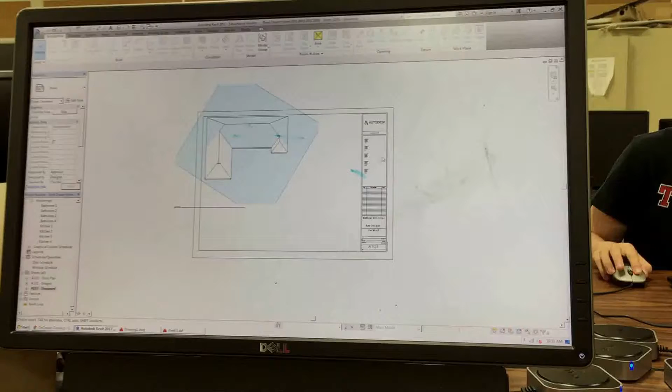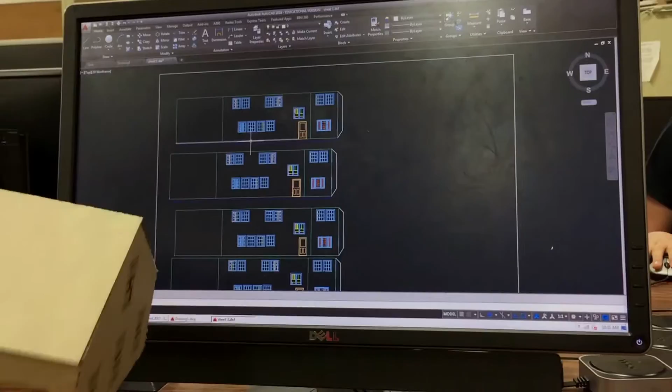Alright, so this little demonstration here will demonstrate how to export views from your Revit model of a three-dimensional house and create two-dimensional views in AutoCAD that can be exported to the laser to be cut out of a material like cardboard and end up with a 3D house model of your Revit model.

So the first thing you have to recognize is that this is a 3D model and the laser only cuts or engraves two-dimensional materials. So you have to extract the two-dimensional information from your Revit model, like elevations, roof planes, things of that nature, and then lay them out on a material. This is your final view.

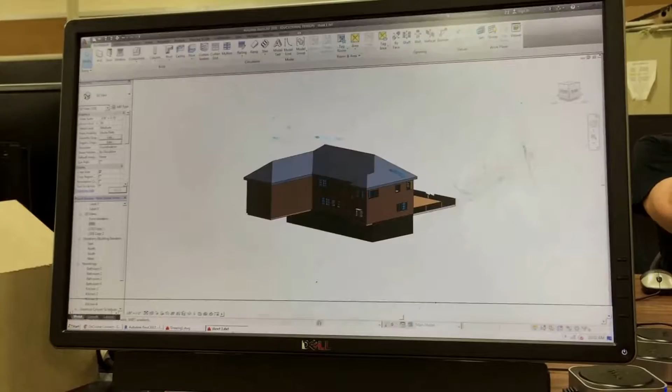This would represent like a piece of cardboard, 2 foot by 3 foot, and then your walls, windows, doors, and then pick what's going to be a cut, scan, engrave, or a dot for folds. Like for example, this is a glue tab I added on here. You might want to dot this line here so it'll fold, like you see here in the house. These are dotted lines so that they'll create folds.

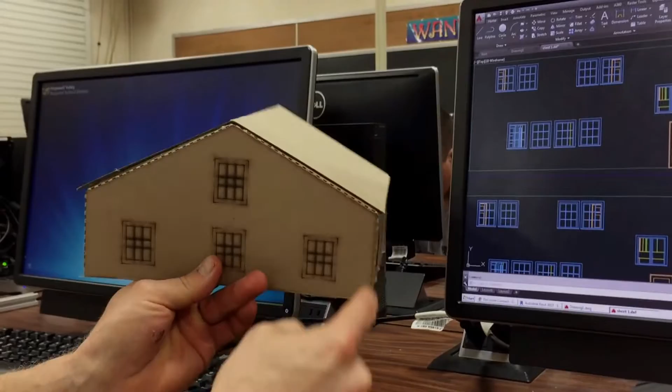And on the inside of your model, which you won't see from the outside, you'll have glue tabs to assemble your model, because if you just have two pieces glued edge to edge, it won't hold together very well. So here's the procedure for how to do that.

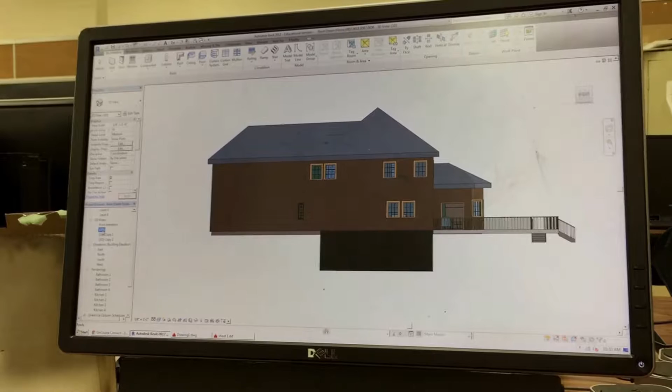So from Revit, you have to start with a simple view, like maybe your right elevation view. You should duplicate the view first. So to duplicate your 3D view, select it, right click, duplicate view, duplicate. Okay, so it creates a copy. Then you should rename them so you know what in the world all your views mean. Maybe call this right elevation, or right for short, or walls.

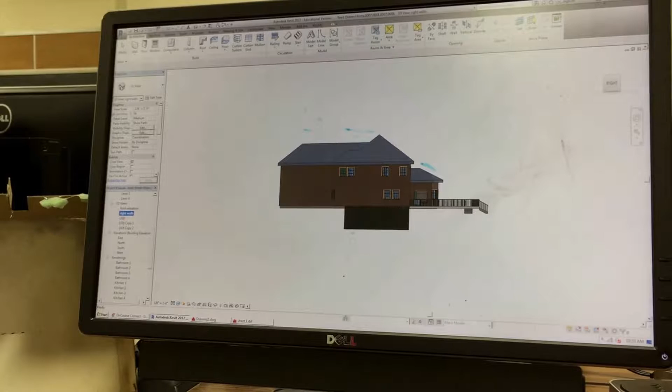So do that. Then, if you're only interested in these walls, you have to isolate those so that you don't get all this other stuff in your exports. So you can do it a couple of ways. You can hide everything from view, or you can select the elements that you want to keep, such as the walls that you want. You can control click to select multiple things.

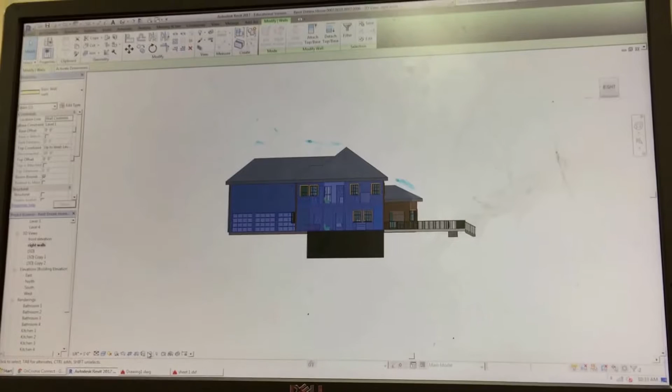And then you can go down here to temporary hide and go to isolate element, and then everything else disappears from view, so you're only working with those. Now that's going to be on this view here. That's why it's important to duplicate it, because you'll see that in a second.

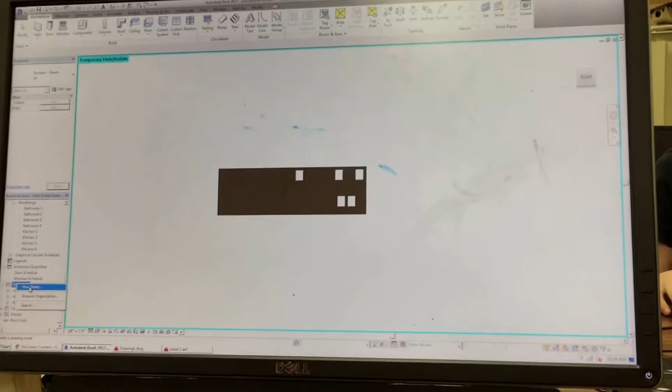So now you want to create a drawing sheet to export this to. So down here, just like you created a drawing sheet before, I right click new sheet and I just picked the biggest one, and here's my new sheet. Once you have this new sheet created, you can drag in your drawing view. So this was right walls I just did, so I can drag that in here and place it somewhere on my drawing sheet and pick a scale.

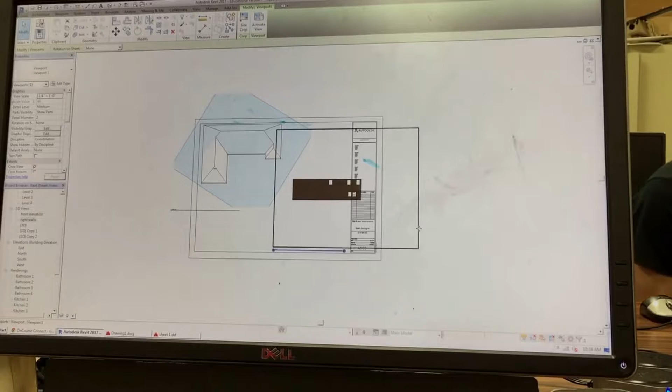So by default it goes to 1/8 inch. I would do 1/4 inch equals a foot, and then that changes the size of it. If you want to, you can crop the view so that you can get rid of these lines, but in the end it really doesn't matter, because all you need is this from here.

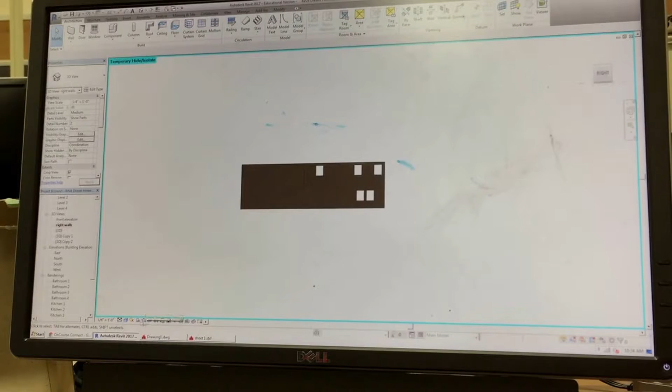You should also change your visual style. You don't need a solid background, so what I found works the best is the 2D hidden. So if you go to, I think it's visual style, change this to hidden line. That way you just have lines for the perimeter, not everything else shaded. And if you go back here to your drawing sheet, you'll see that updated.

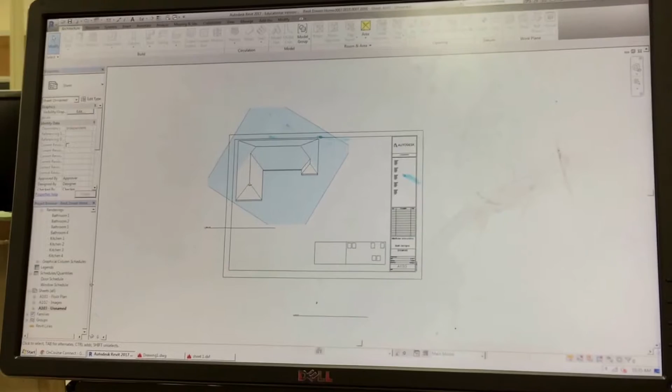Alright, now for the roof. I created this before. So the roof is one of the most tedious parts, because your roof can't just be exported from one of your right, front, or back views, because all these roof planes are sloped. Unless you have a flat roof, which most of you don't, you have to export these planes one at a time. So here's how to do that.

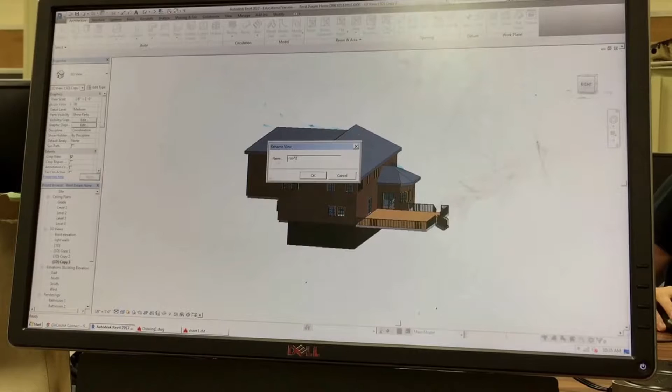So if I go back to my 3D view here, okay, I can duplicate it first again, right click, duplicate, call this roof 2 or something. I'm going to isolate the roof, so I only see that. Select it, glasses, isolate element.

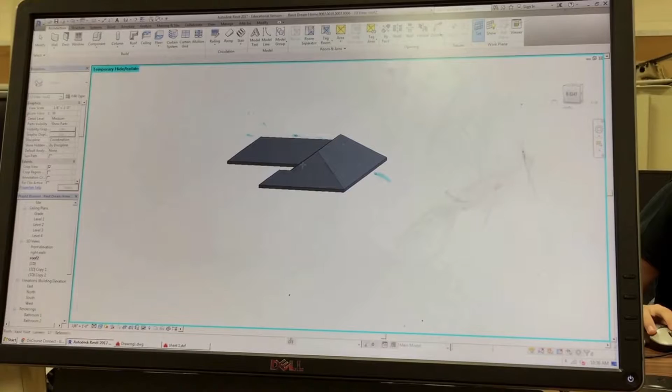Now, if I want to export, say, this plane here, I have to set the work plane to be aligned with this face. So I hit set work plane, pick plane, okay, and now select the plane I want, and then show, and you'll see if you rotate this that that's aligned with the plane.

Now we have to make that parallel to the screen, so when we export it, it'll be true size. So the way you do that is right click on the view cube, orient to a plane, and that's the plane we just created. Hit OK, and you'll see it's aligned with the screen.

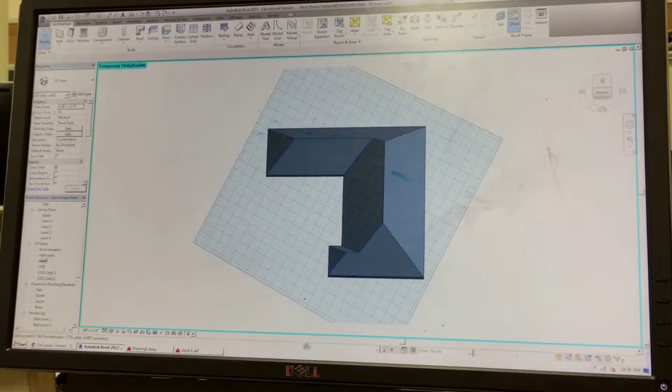Then we can go back to our drawing sheet here and just drag this view in here, roof 2 I think it was called. And then there it is. Our scale, we want to make sure it matches. 1/4 inch equals a foot.

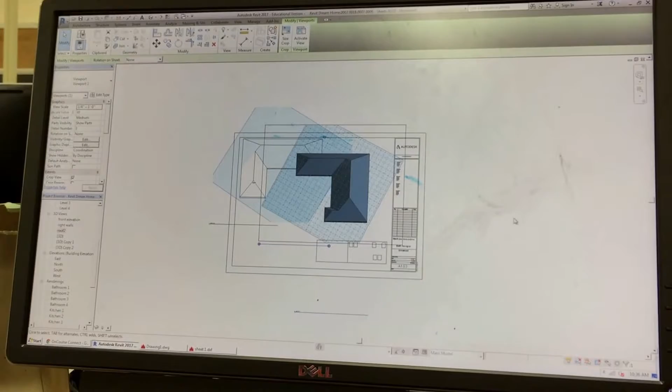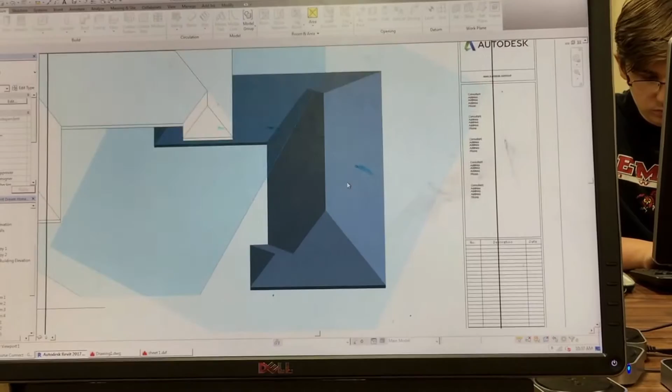And then we can readjust it and so on. Now, recognizing in this view, the only useful geometry in here is this face here, and also this face here that I'm outlining with my mouse, because this face and this face are parallel to each other. So I don't have to recreate another one for here. But this one, this one, this one are useless for this view because they're not parallel to the screen. So you'll have to create another one like I did here for the front face.

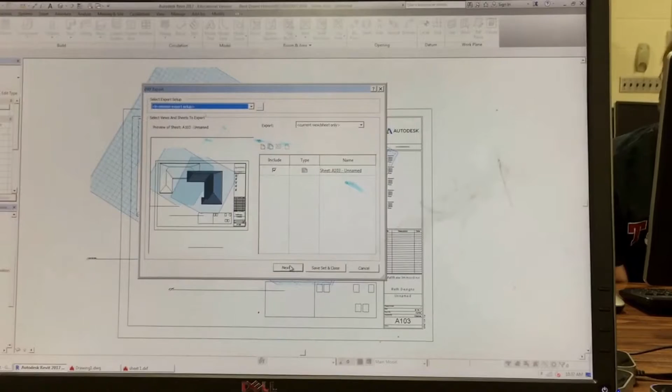So once you organize this to how you want, then you have to export this. So I suggest you set it up once and export it once. So to export it, you hit the R button, export, CAD, and select DXF. Pick that, and then select next, DXF. You want to know where you saved it, so this is Matt, so you put it on his P drive, and we'll call this sheet 2. 2.dxf, hit OK. I guess leave this.

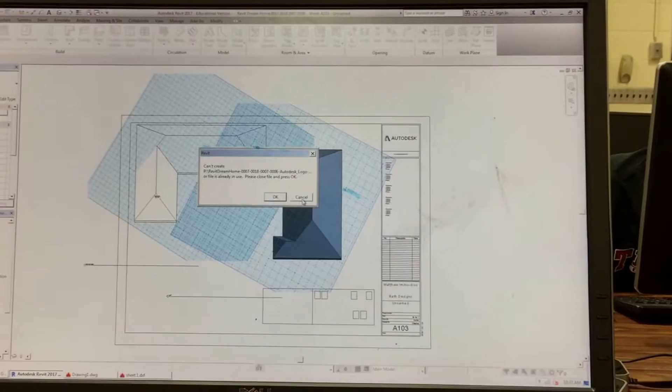Oh my God. Alright, so ignore that part, and then we exported one successfully before, and we just went File, Open from AutoCAD. What's important here when you go to find the file is you have to change this from DWG to DXF. So here is the first file. Alright, so we're picking up part 2 here. So from Revit, we exported the view as a DXF, and now we just opened it in AutoCAD.

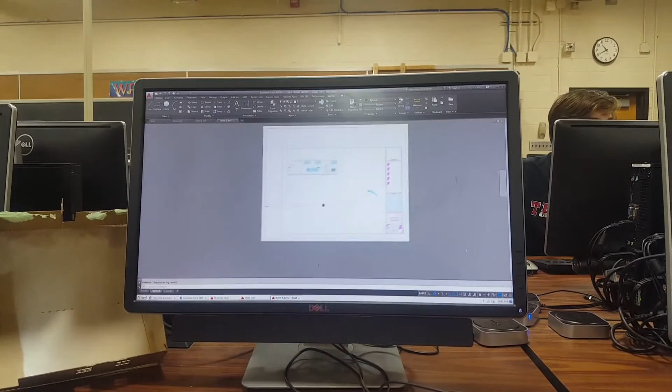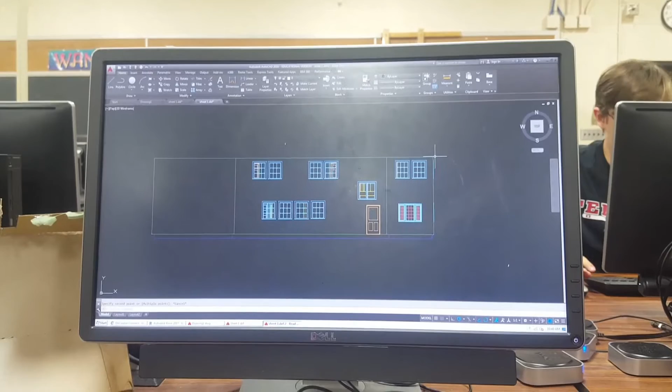But when you open it, you see this view here, and it looks all white, and you're wondering what in the world's going on. To get to your actual model, you change this from Layout to Model tab, and here's the view that we exported from Matt's Sheet 1 from before. A few things to pay attention to. If I measure this, and I hit DI, for example, and click on the overall length, notice that this is 68 feet. That's obviously way too big, so we have to scale it down. If your scale is 1/4 inch equals a foot, you're going to be scaling this by 1/48.

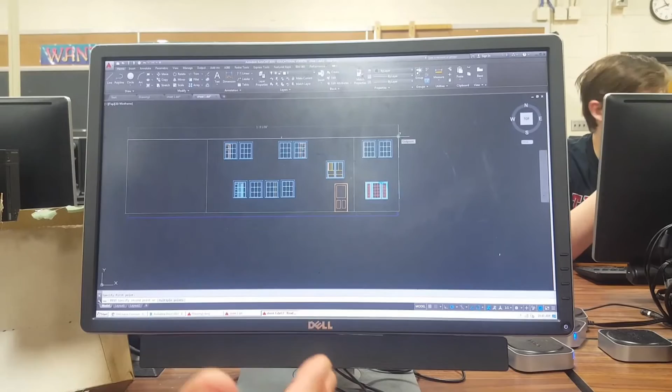So to do that, you hit the Scale command here, select Scale, select the whole object, right-click, pick a base point to scale from, and then type in 1 divided by 48 as a fraction, 1/48, no units because it's a scalar, and then hit enter, and then all of a sudden it got really small. If we double click the scroll wheel and measure it now, DI, for distance, our model is 1 foot 5 inches. That's much more reasonable. That's about this large for a model, which would be an appropriate size model to use.

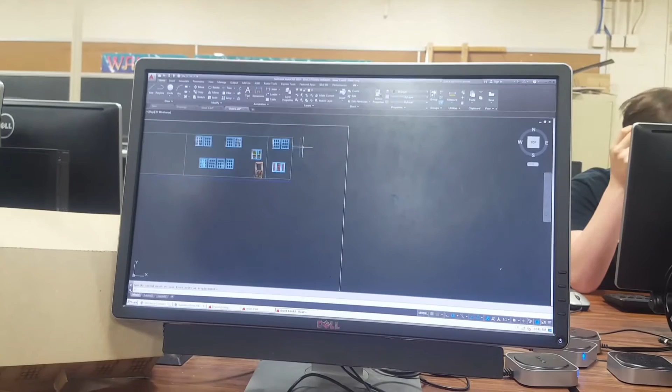Last thing from here is, as we have multiple views, we have to figure out what material size we are working with. So if your cardboard is 18 by 24 inches, you can draw a rectangle that's that big. So draw a 24 by 18 inch rectangle, and now you can see how many walls or floors will fit on this page. So now I may have to create a joint here, so I can make a glue tab by sticking out like this off the side. I could just freehand it with the line tool, and then this would be a fold.

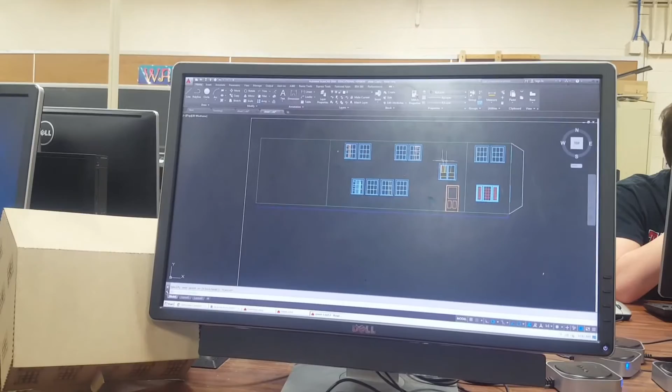So the next thing is to organize this by color. I have to decide what's going to be a cut, what's going to be a scan, and what's going to be an engrave. And if you remember from the last laser project, we use colors to determine that. So by picking lines and picking colors, like maybe a red's a cut, and I want to dot this, so I'll make this blue. You pick your own color pattern, but decide what you want for a cut, scan, engrave. Then you organize this and go from there.

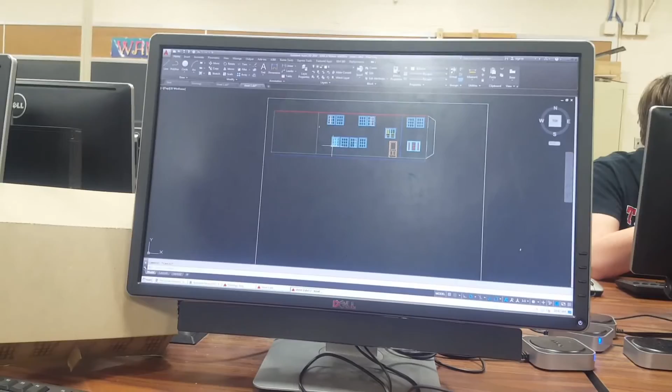One of the last things is you have to make sure you delete overlapping lines, because if you have one cut and one engrave, it's going to engrave and then cut it, and then your window's going to fall out when in fact you want it to trace the outline. So to fix that is a command in AutoCAD called overkill. Type in overkill, just like I said it, hit enter. Select your objects, hit enter, and then it comes up with lots of options here.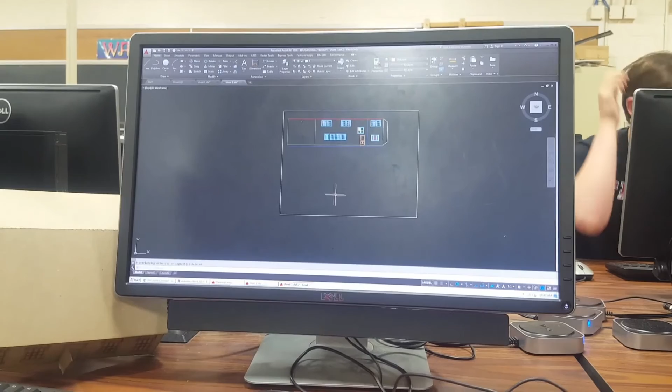One of the options here is to delete duplicate objects. So you can probably leave the thing by default and hit OK, and it should delete overlapping lines. So there were no overlapping lines in this case, but if you had overlapping lines, it would in fact delete them. Last step from here, this is already a DXF, so you don't need to do anything.

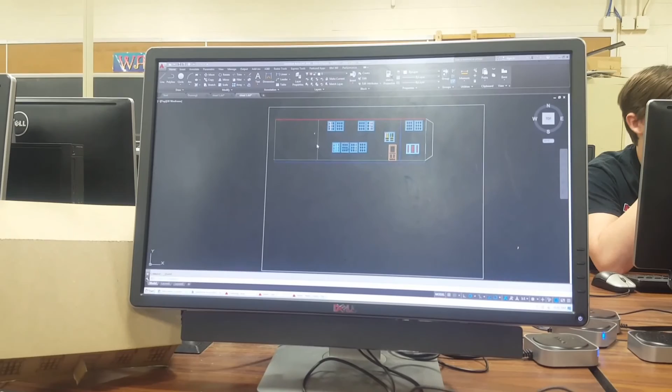Just make sure it's saved, and then open up RDWorks from here, which isn't installed, but you would import it by going Control-I for import, and then make sure your units are set to inches instead of millimeters so it's scaled appropriately. Thanks for watching.